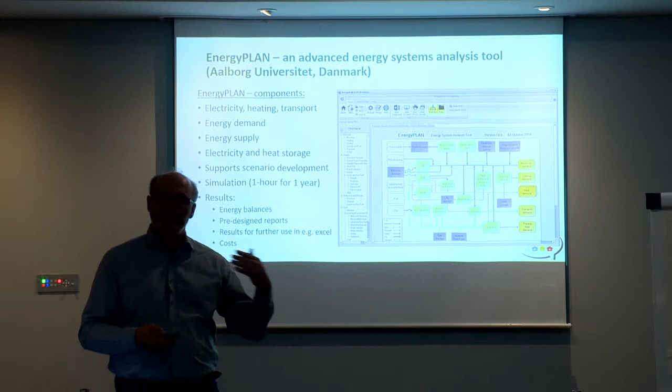So what is EnergyPLAN? EnergyPLAN was developed by Aalborg University in Denmark with the idea to help a developer or an energy systems analyst in the transition from a fossil fuel based energy system to a sustainable renewable energy system.

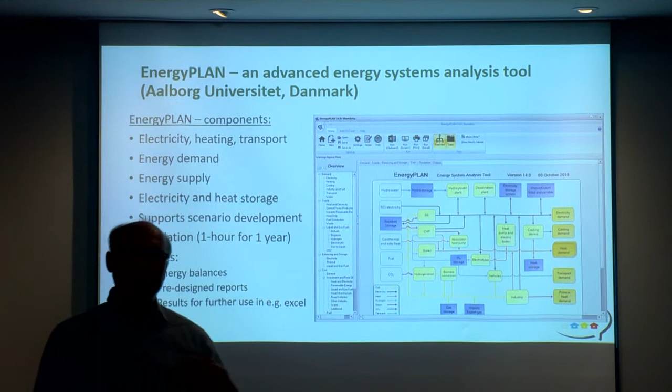And it was also one of the first tools which tried to integrate different energy sectors with each other, electricity and heating, and also transport.

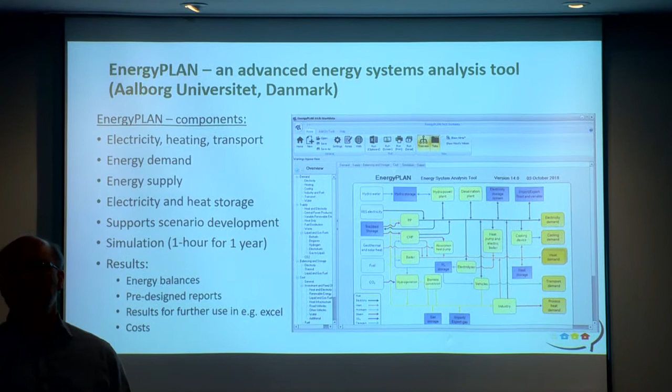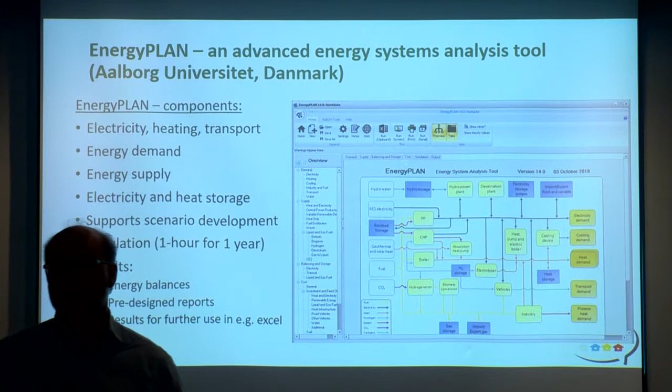Because the vision was already in the late 90s when they developed the tool that, of course, when we invest into wind, it will lead, and it has led, into overcapacities. With more wind, electricity prices drop. For example, we can use electricity now much more for heating than we used it before in some countries. Of course, Sweden and Norway are exceptions because we have so much hydropower - we have used electricity for heating since 50 years back.

So electricity from the overcapacities which we create can be used in district heating systems with heat pumps and accumulator tanks. Large storage tanks are built and hybridized, let's say, with biomass or solar thermal.

But it also opens the possibility with electric vehicles, because when we replace fossil fuels in the transport sector with electric vehicles, we create electricity demand. And the vehicles have storage, so that will also help to balance an integrated system.

And electric vehicles - I think already today the prices have dropped, as with other technologies we have experienced: solar PV, wind onshore, wind offshore. The prices have come down tremendously in the last 10-15 years, and even electric vehicles will come down even further.

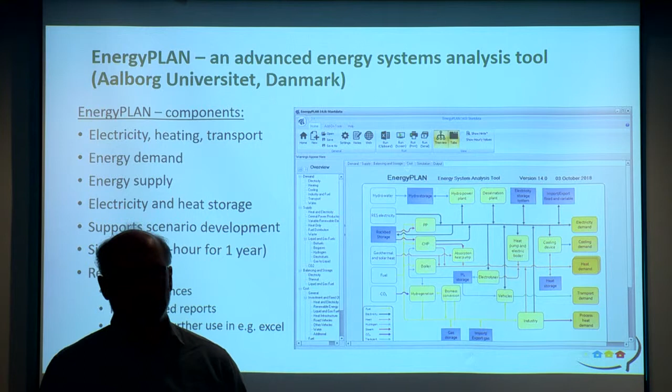But I think already today, if you are a commuter and travel every day, 15, 20, 50 miles back and forth to your workplace, it would be worth it to invest into an electric vehicle. At least in Sweden it's worth it when you compare the prices of fuel and electricity and what electric vehicles cost today. And they have less service costs, etc.

So EnergyPLAN includes the components electricity, heating, transport. Transport has also a lot of features where it can convert electricity into what they call synthetic fuels, hydrogen, methanization, etc., and can then be used in the transport sector. But I think for us here in this training, we won't look at the transport part - it's just a bit too much.

Electricity and heating, we look at these two parts. So the energy demand is modeled in the different tabs - this is the demand part with electricity, heating, etc. And in the reference energy system picture, it's these orange boxes when you open it. They are not clickable, it's just an overview about what EnergyPLAN provides once installed and opened.

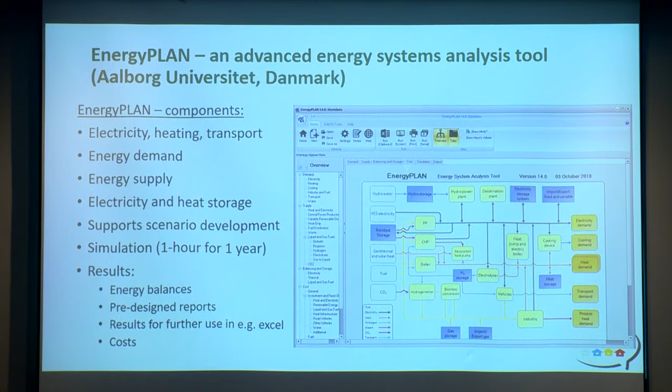And then of course the supply side here - we have hydro, we have other renewables, solar, wind onshore and offshore, etc. And then a lot of conversion options in between.

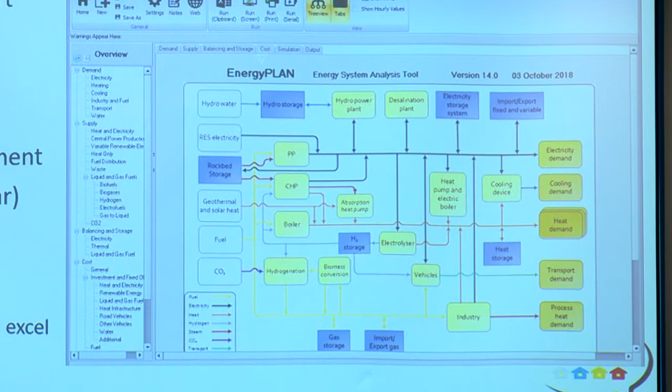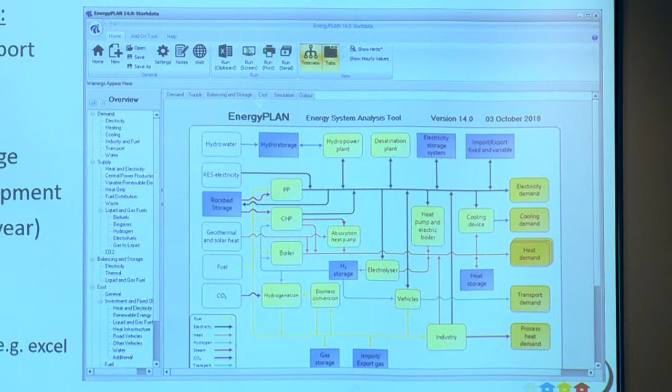Supply. And then what is perhaps of interest in some of our cases, as we discussed, electricity storage and also heat storage could be an option. Heat storage in the case if you have district heating systems. Many older district heating systems have not installed larger storage tanks.

But today the overcapacities of wind and cheap electricity prices can be used to charge the storage and then used in peak demand periods. Many people think district heating utilities earn the most when it's the coldest, but the problem is then during that period they actually have to start their peak boiler. Usually they have 2 or 3 boilers, and the peak boiler is often fired with fossil fuels, not the large boiler which carries the base load, which is perhaps wood chips, biomass.

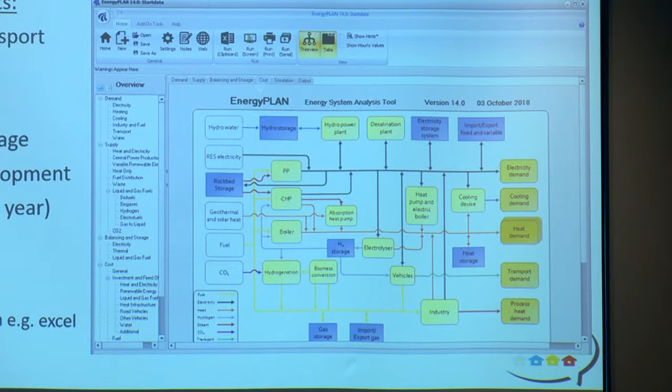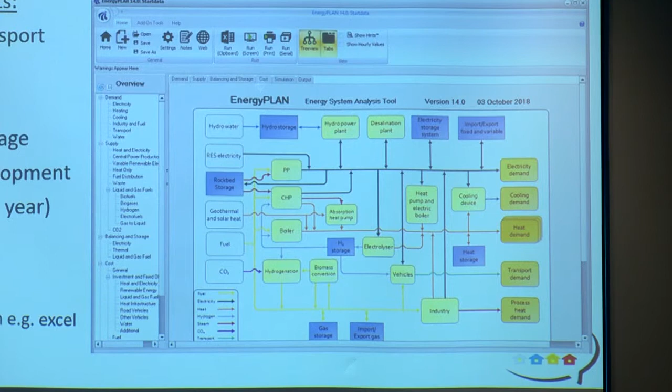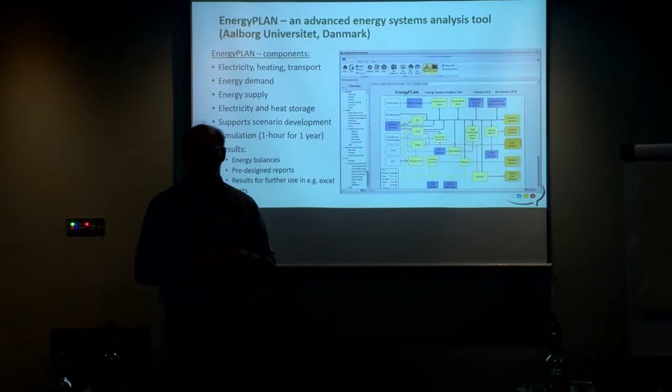And that is actually costly - it also costs CO2 tax in Sweden, but people don't pay more during peak periods. There is also a trend now in district heating to introduce time-of-use tariffs, so that people pay more when it's very cold, creating an incentive in the market to invest into more energy efficient buildings.

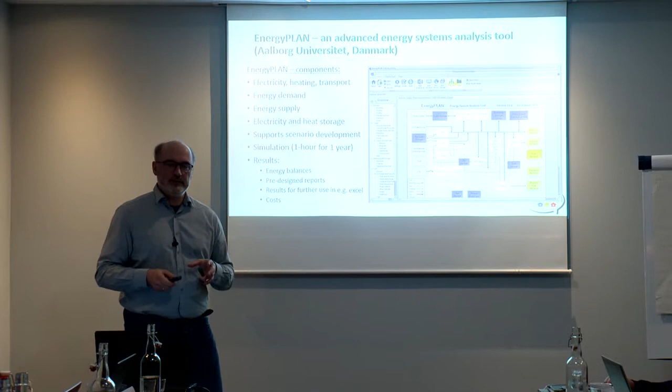It supports scenario development. And how does it do that? Of course, you create your model, put in all the data, and it's not so that on one half you have your base case and then you enter new data in a second half.

You use your base case, change data there, and save it in a separate file, documenting what you are doing. That's a bit of a challenge to keep track of what you're changing, because you can change your model easily with a few steps and then save it and overwrite your base case. So that needs to be kept in mind when you've built your reference case - save it and copy it, and then start creating a scenario in a copy of the original.

So that's a little hint how to use it. We can run these simulations, and they are very fast. They take just a second or two in the system when we enter new data.

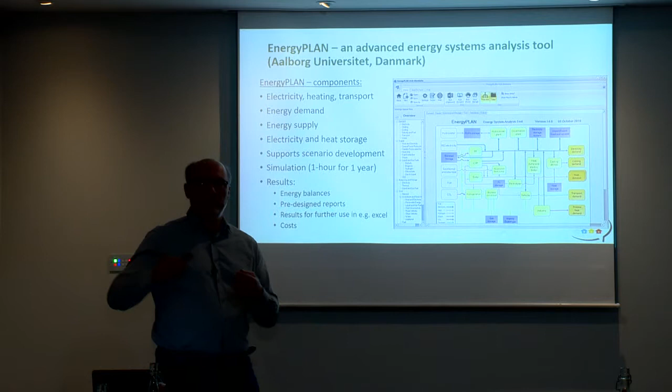Most tools which look at long-term optimization or simulation run in 1 year time slices only, so you get results for 2020, 2030, 2050, etc. EnergyPLAN was developed to have 1 hour time slices for 1 year, so 8,760 hours. It's a special case because they actually model a leap year, so you need 8,784 hours. When you get data for certain years, you always have to extend this extra day.

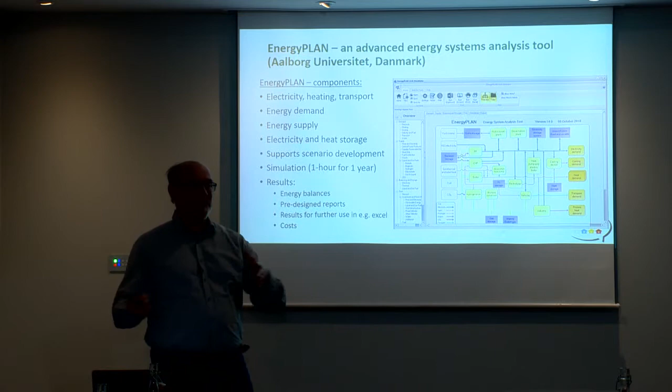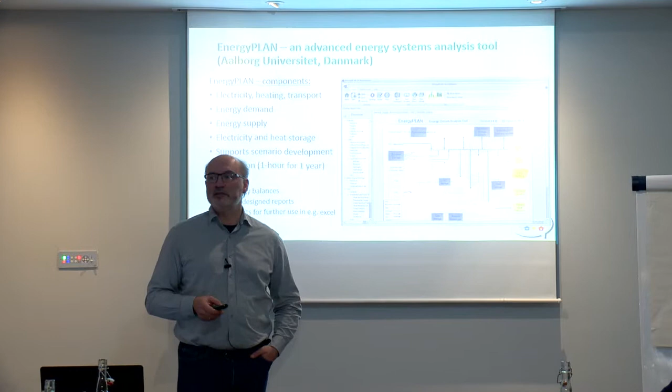But the advantage of these 1 hour time slices is that when you include renewable energy sources which go up and down every hour, or even every minute which we cannot model with this tool, but at least every hour we can have higher or lower wind production, and also higher or lower demand in households, on weekends, or during peak evening hours. This can be covered by this model, while tools that help develop long-term strategies do not cover this.

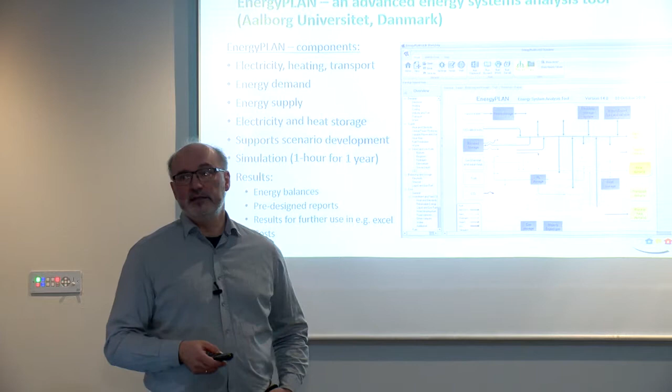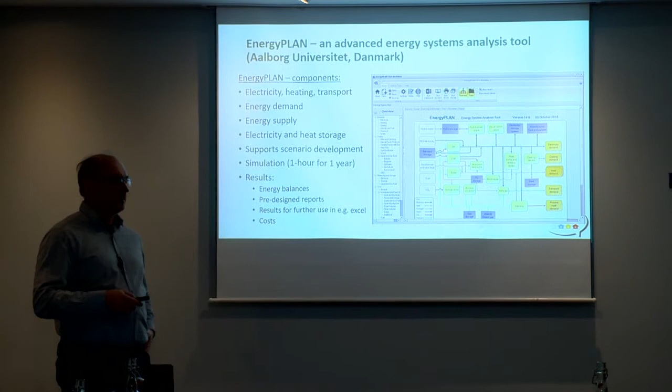So what do we get for results? We get the energy balances, demand and supply, and see how it's balancing out. As we invest in local wind production, we can see that we import less, and we also look at the costs, because importing costs money and exporting creates revenues.

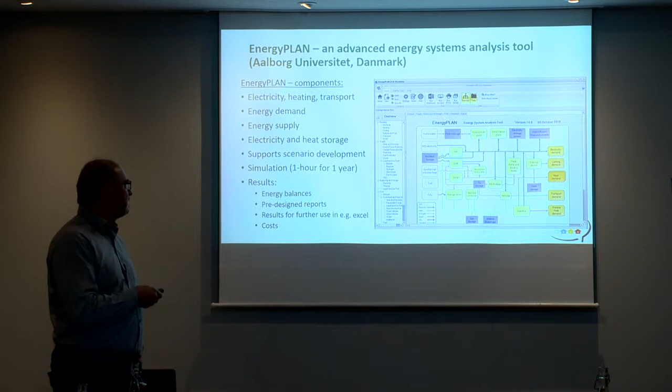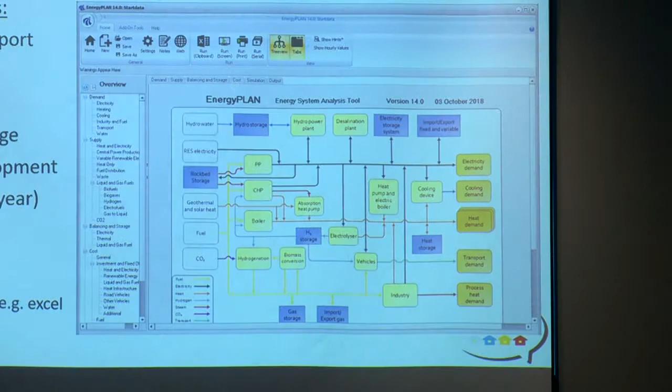It has some pre-designed reports which we get when we click the run buttons, run screen or run clipboard. They produce the same results, but with run clipboard you can easily paste it into Excel, which most of us have. Run screen just puts the results in a separate window so you can look quickly at it.

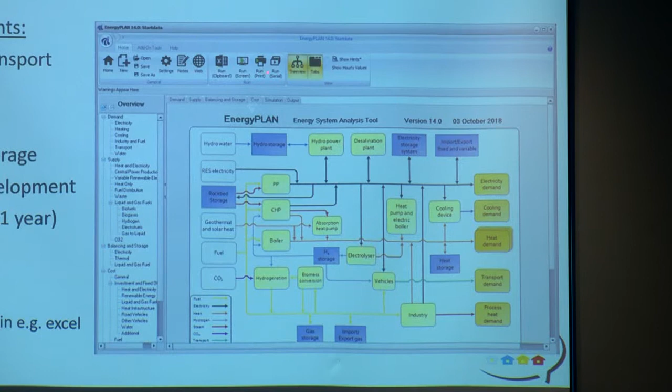Then we have this run print option, which creates a 2-page predefined report with key data, which can be attached as an annex to a report you create. With run clipboard, you can copy it into Excel and create your own diagrams comparing scenarios, etc.

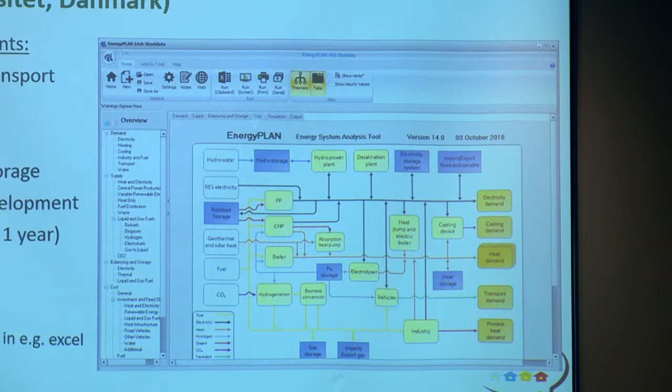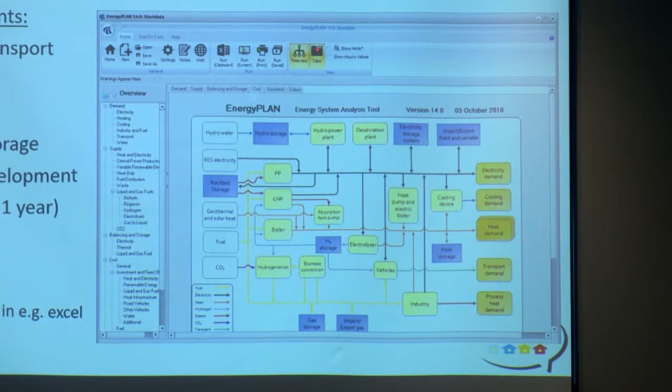Just looking at this picture, we have navigation in this tree navigation part, but we can also switch on this tabulator navigation. Then we have tabs up here which allow us to click into different screens. But from my experience, it's most practical to use the navigation tree, though you will find out yourself.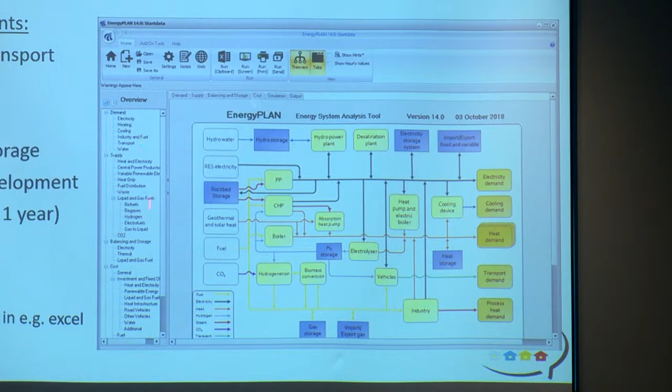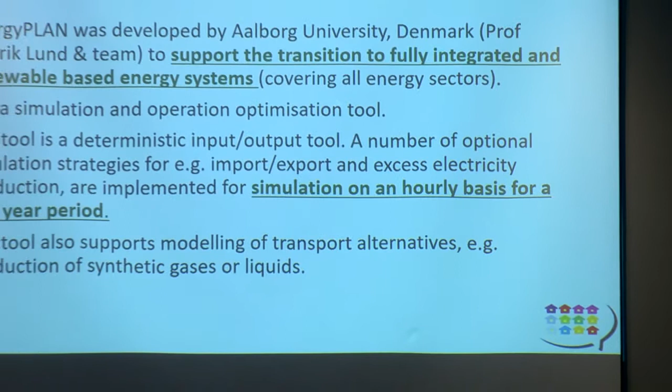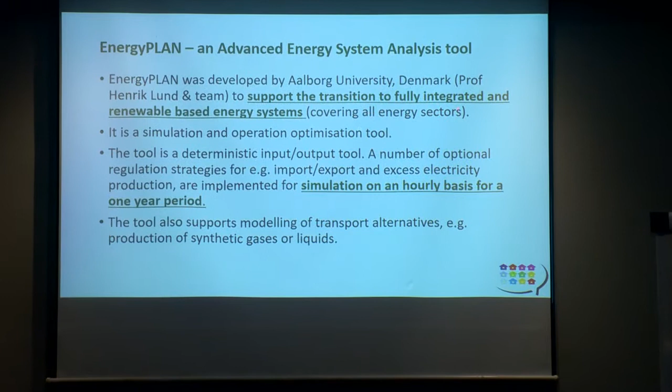So just to summarize: developed by Aalborg University in Denmark from the 1990s to support the transition to fully integrated and renewable-based energy systems, covering all energy sectors. That was also important, otherwise you cannot really talk about integration if you don't have a model which helps you work on that integration. And it's a simulation and operation optimization tool, simulating on an hourly basis for a 1 year period.

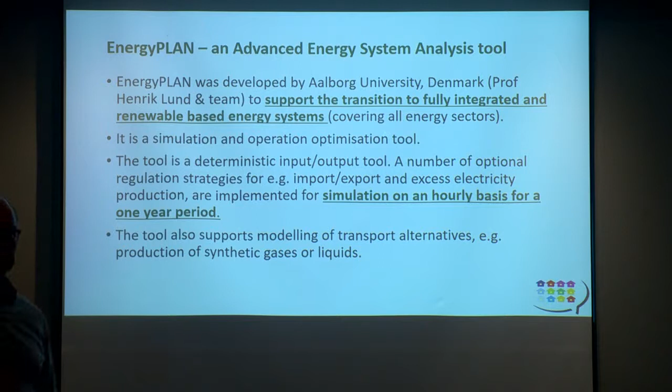Then I usually get the question, how do we model 2020 or 2030 scenarios in that time? You look at your population development and economic development. If your population growth trend is like 2 or 3% per year, or 1%, then instead of 2,000 households, you will have 2,200 households by 2025 or 2030. The household energy consumption then has to be created and enlarged by household energy consumption per household, and you increase that to get a scenario for 2030.

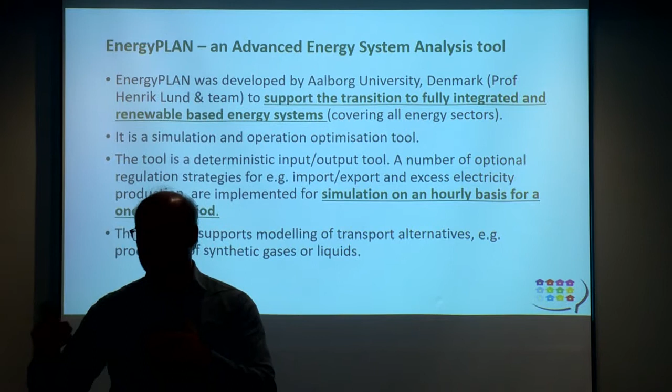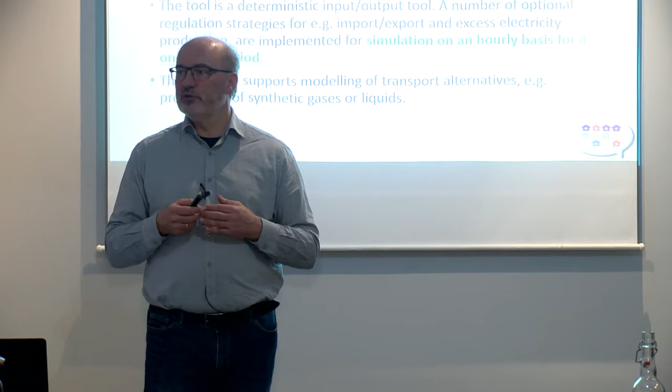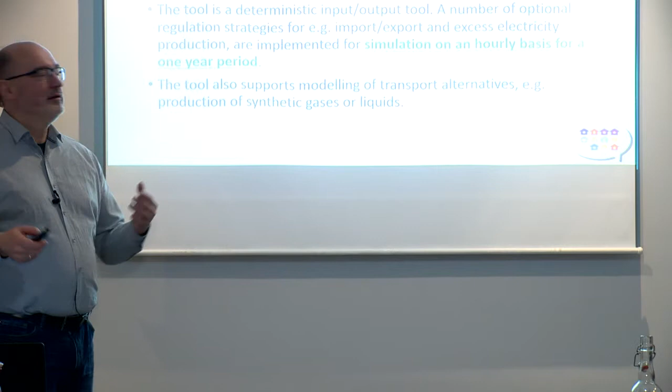Same with economic growth: when you know you have a quite big industry in your peninsula, you could discuss with the different industries and say, we plan to expand, and this is what we expect in the next 10 years, and then you can create the 2030 scenario for energy consumption. At the same time, you should consider more efficient use of energy, so energy demand is increasing on one side, but also dropping because we invest in energy efficiency as well.

Other cases for 2030 scenarios: today there is no wind farm in our community, but the master plan we just created foresees that we will have, let's say, 40 to 60 megawatts in our community, and that can be implemented in a 2030 scenario. So even if you have only a 1 year period in a simulation tool, you can design your future scenario as you go along, by putting the right input data into the system.

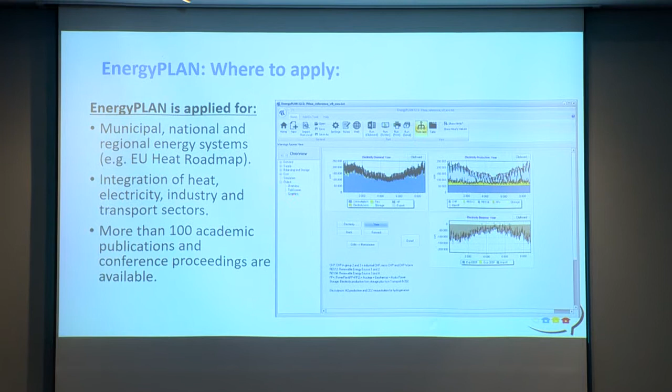So this is, for example, how the graphics look when you open the output navigation here and click on graphics, you will have some diagrams like this: electricity demand for the year, electricity production for the year with different sources, and then this is the electricity balance for the grid.

In this case, most of the time we have import from the grid, and only in a few hours per year we have export from the hydropower or wind power installed. You have buttons for clipboard, so you can copy paste these diagrams into your reports as well. If you don't like them, you export the hourly data.

Whenever you do a run, you actually get monthly averages in these predefined reports. When you want to look at the hourly data, you switch on the hourly possibility here. Then you get long reports, but they can be used to create these diagrams on your own, and you can build on that.

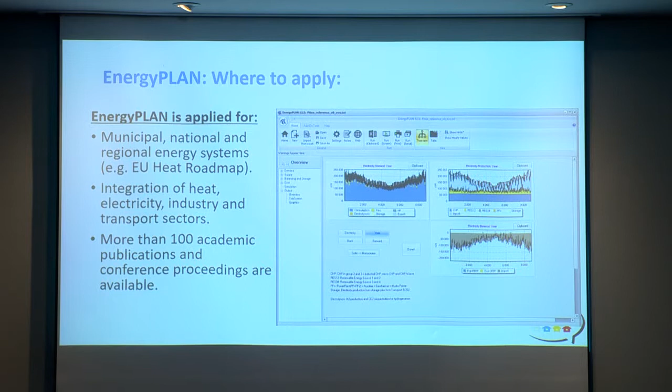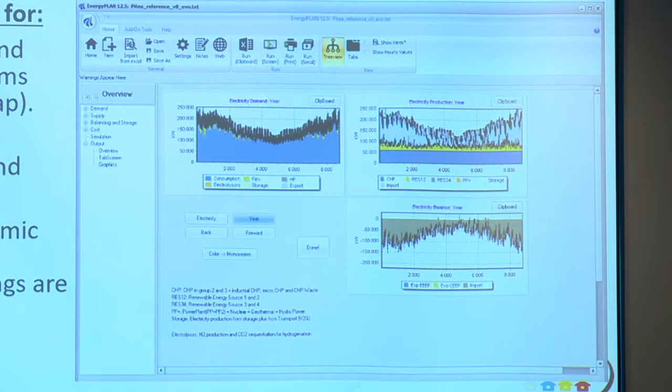EnergyPLAN has been used in the past on municipal level, on national level. It was created for national level, and the first examples are of course Denmark, because it was developed in Denmark. It was also used on a wider level, like for the European heat roadmap. I had a small slide on that in one of the presentations. So it can be used also in a wider perspective.

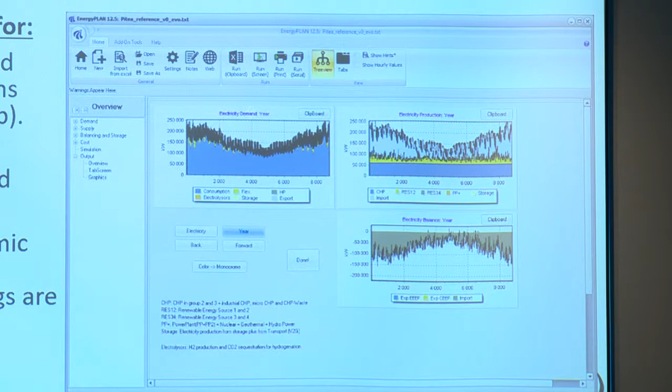Again, it integrates heat, electricity, industry and transport sectors. We have seen many academic publications on how to use it and in which cases it was used. A very interesting one was just published a few weeks ago about the Åland Islands.

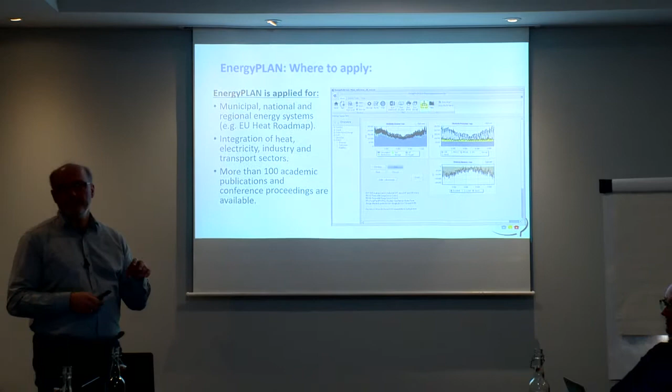These islands lie in the Baltic Sea between Sweden and Finland. They have two power cables, one from Finland and one from Sweden, and they want to expand their tourism industry, etc., but the power cables are insufficient. So they either have to invest in expanding the power cables or make sure investments go into local production.

And this doesn't only include production but also storage and balancing, to make sure the power cables they currently have are not overloaded, both in import and export, when they invest in wind, for example. So that was very, very well done.

I can perhaps also share it. It has supplementary materials which also describe very well how to create your input data, etc. That would be very relevant.

So how does the workflow look like? We already started the workflow. We have created these reference energy systems. Some of you have already done some inventory on the number of buildings, etc. When we know how much energy each building consumes on average, we can create the annual energy consumption, the annual demand.

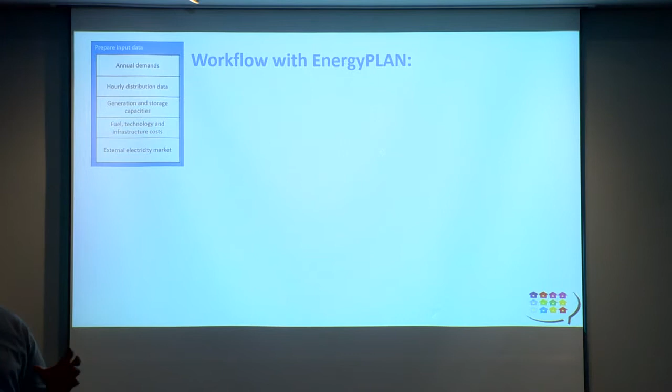This is what EnergyPLAN needs most: the annual aggregated data on energy consumption in the different sectors. As a second part, the hourly distribution profiles, which perhaps you have come across when you downloaded and looked at it. So we need to know how this annually produced or generated energy is distributed over the year.

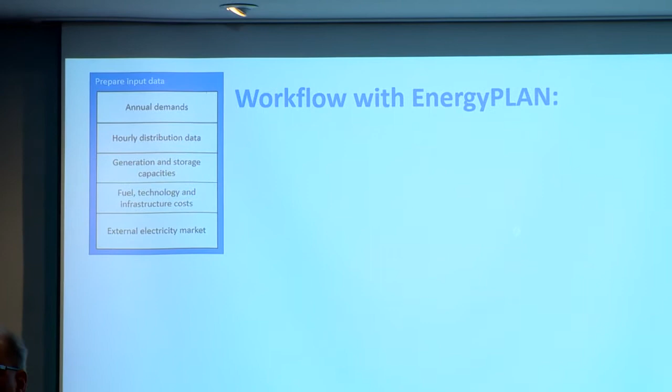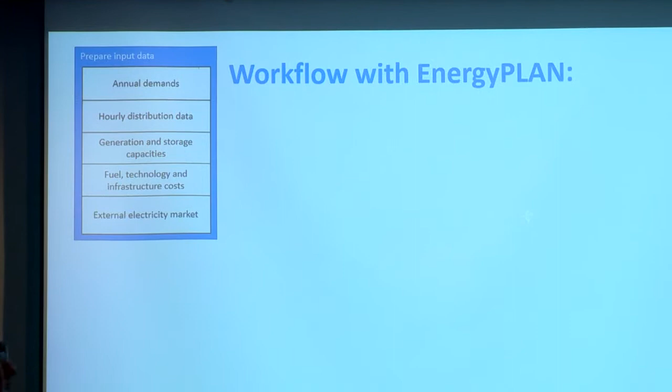So these two are the main data inputs we need. And this data is of course very site specific for the country, or for Åland, or for any of the examples we have seen before - the annual demands or supplies and the hourly distribution data.

So the hourly distribution profile - if a household used like 20,000 kilowatt hours per year, you don't yet know how much is the peak demand on Friday evening. Household electricity demand usually has a peak in the morning and a peak in the evening when people prepare breakfast, cook in the evening, or take showers and the hot water boiler kicks in.

A commercial building usually has a peak over the day when all the people work in the offices - you have ACs running, lights, computers, etc. So this is the daily profile, and that can be sliced into hourly slices, and also all over the year, of course.

We don't need these profiles for each house. For example, for the heating demand, we take temperature profiles from the meteorological institution - yeah, from MET, in Sweden it's SMHI. You get hourly temperature data for the location or nearest weather station, which can be converted into the heating degree day distribution profile, the driver for distributing the annual heating demand of 20 megawatt hours into hourly time slices.

As I said, the aggregated data in the national statistical databases is usually on municipal level, and everything below is more or less a bottom-up estimation. You have, say, 200 residential buildings, most built before 1990, some built later, and you have to create your own estimation, as long as you can justify your assumptions. Of course, you will never get it exactly on point, but if you're within plus or minus 10%, it's good enough.

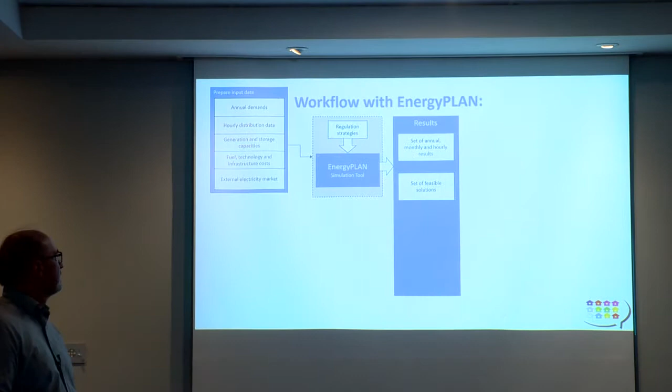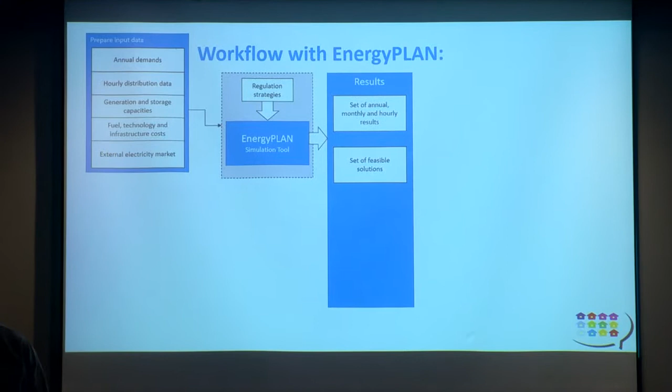So that's like preparing data input, and then we feed it into EnergyPLAN - we will look at later how to use the different screens. After we've done the input data, we get some results, and then we compare it with reality. Every model, of course, is a simplification, so we will not get an exact picture of reality, but when we validate our reference case, it should actually reflect what's happening in reality.

And if you have deviations, it could depend on your assumptions, or you don't know the exact data of the technologies used, like the district heating system, the size of the boilers, etc. But you can always justify that you are within a certain range, and that your model is good enough for your purposes.

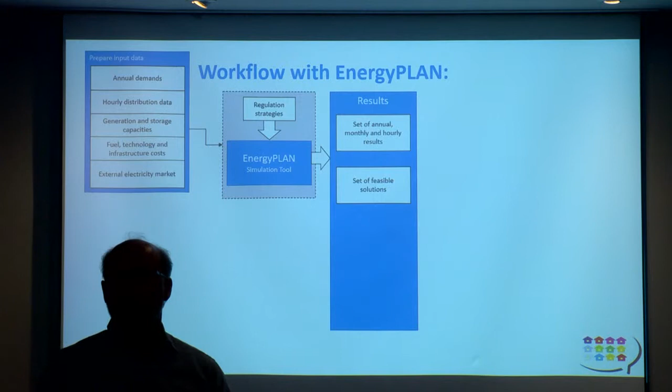As we discussed, starting with low-hanging fruits, and then resources - what land is available? Do we have an area of 2, 3 or 4 soccer field size which we can use for solar PV? Is there an old landfill which cannot be converted into building area, so we put our solar panels there? Or do we have an old industrial area which is contaminated, which would be very costly to put into shape for human purposes - put solar panels there instead. So you always have this, especially in the smaller community area, which helps you limit your scenarios.

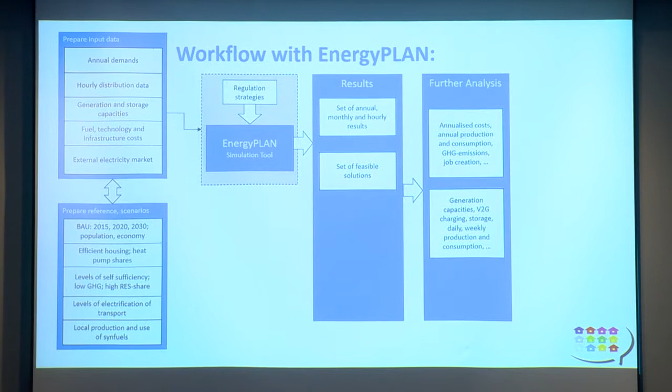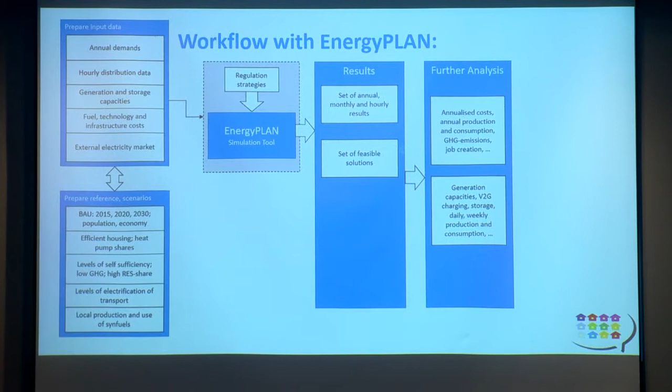Okay, we're talking about scenarios. As I said, after you've done your runs and you know what data you want to look at - is it mainly carbon emission reductions, or increasing the renewable energy share in the heating sector or electricity supply - you create your scenarios. The scenarios lead to new input data, and then you do the simulation again, analyze your results, and this circle will be repeated a few times until you settle on what scenario you really think is the best one.

One of the case studies we did is the Piteå case. This report on the Piteå case is quite comprehensive - it includes more or less a step-by-step guide on how to create one. But what was our starting point? It was actually the climate and energy plan from Piteå, a town of about 40,000 inhabitants, or a municipality. The main town has only 20,000, and then we have the smaller villages around.

They are also a member of the Covenant of Mayors, and for that they created this climate and energy plan, called the Sustainable Energy Action Plan. So what were their ideas by 2020, and then also by 2030?

The idea was to replace direct electric heating with individual heating with heat pumps. A lot of houses in Sweden have direct electric heating because of traditionally cheap electricity prices. Electricity prices are going up, and direct electric heating causes high electricity peak demand during the winter period. And for example, another scenario says they want to invest in electric vehicles - then the electricity grid will not be able to provide the power for both the electric heating and the electric vehicles.

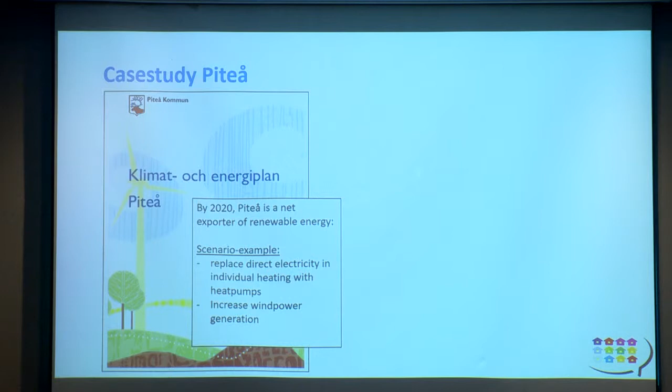So something needs to be done. Heat pumps is a scenario. Another scenario example is because one of the goals in Piteå is to become a net exporter of electricity. They don't want to import, but at least over the year balance, they want to be exporters. So one option for that is to increase wind power. They already have about 145 megawatt installed by today, and in the master plan there is about 1.2 to 1.8 gigawatt to install in the community. It's a huge community.

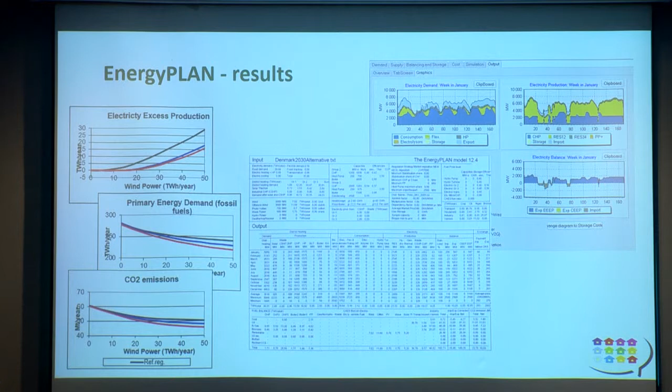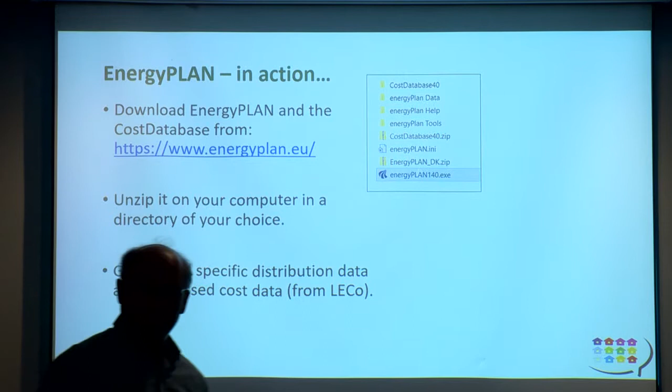Yeah, so I think we are way over time, but starting to get a little bit tired here. Not only me, I guess, also you around here.

The idea was actually to check if everybody has installed it, but I think everybody has done it. You have installed EnergyPLAN, gotten it to run, looked at it, clicked around a little bit perhaps. Have you had a chance to look at the exercises as well? No? Okay, there's a lot of training material also on the website, and step-by-step guides for simple exercises. They provide the task, like in school—you get your task, and in school you don't get the solution, but on the EnergyPLAN website you also get the solution. So it helps you develop your skills step by step.

But we will do some of it together tomorrow. I think it's really enough for today.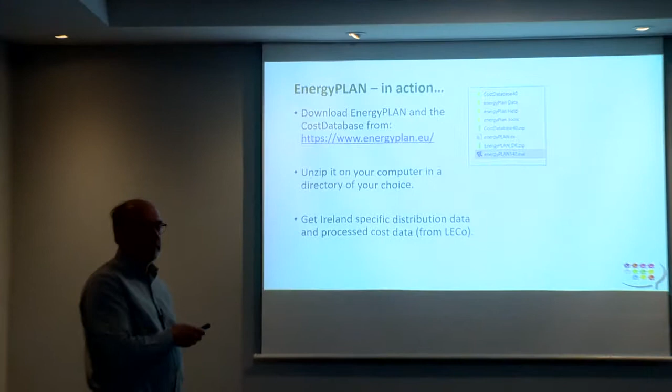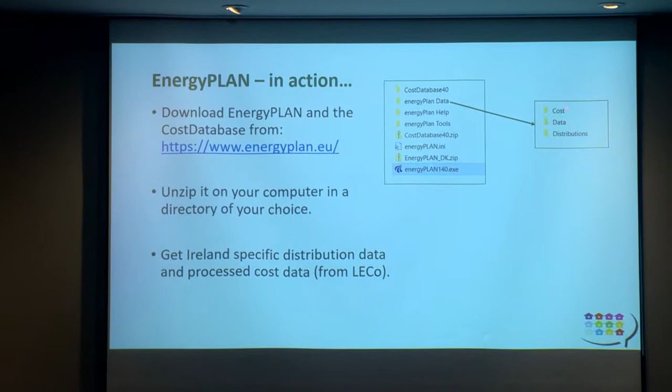We know where to get it, and when you have installed it and unzipped it—oops, wrong button again—you will have a folder structure like this. You have the executable, which you just run, and then you have these directories which are mainly used by EnergyPLAN, especially the data directory, which includes the cost database, and then the data, which is the actual project data file, and these hourly distributions, which we will see much more about tomorrow.

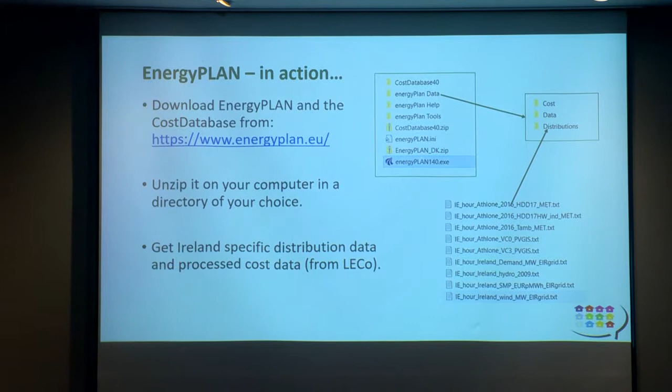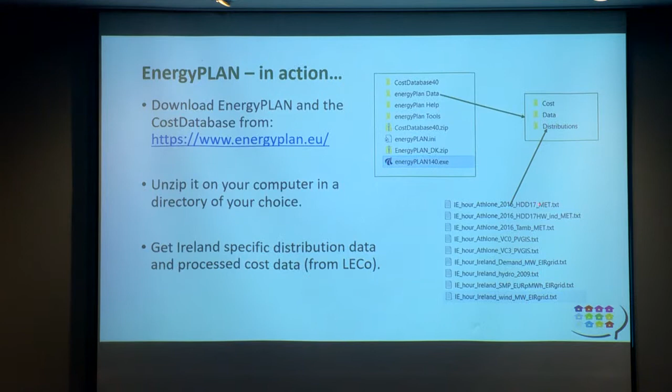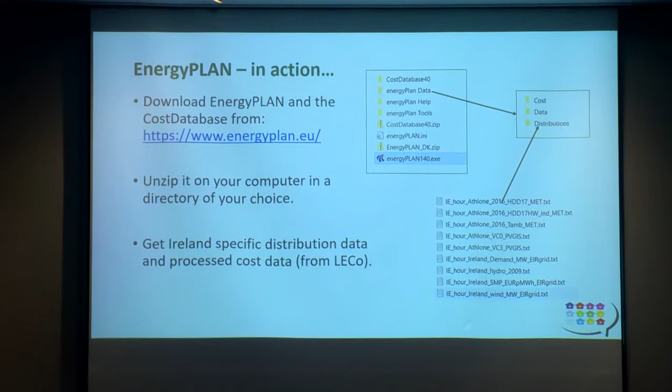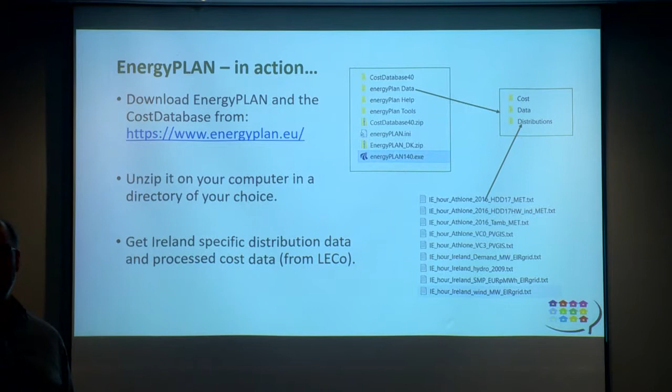In these distribution files, I managed, with help of Xavier and Christoph, to create these hourly distribution profiles which we need for all our projects. We have this HDD data, the heating degree day data, which are the converted temperature data. The temperature data file is also there, but we don't use it directly. Then I have created and used this PV-GIS simulation, or solar simulation tool, which is available online, provided by the European Union, the JRC, the Joint Research Center. So we have two solar files.

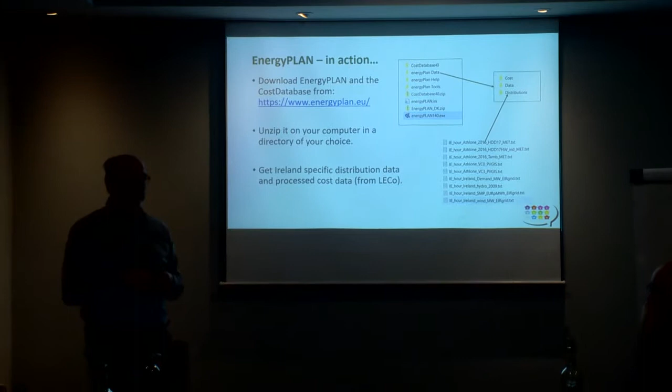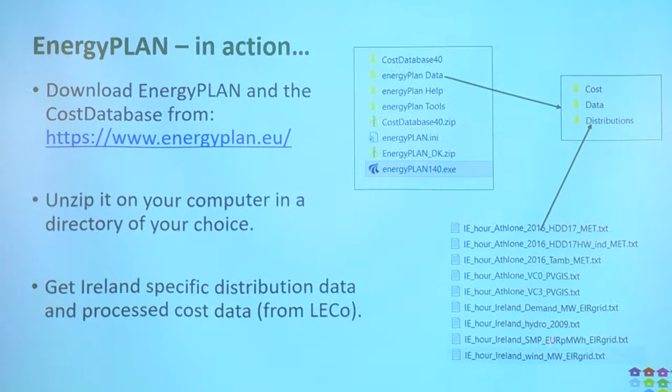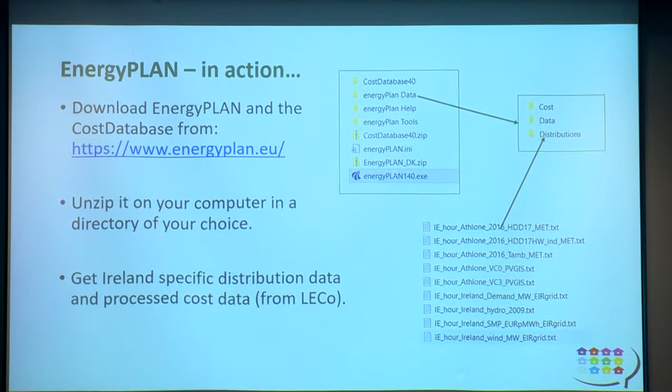And then we have the demand hourly profile of the national grid. So this is what we will use for the electricity consumption profile for our little case—of course it can deviate a lot from our actual case, but this is what we have got for now. There is also the electricity prices here from the system marginal prices. We also have wind production from Ireland, the total Ireland wind production hourly profile, which is of course a mix of offshore and onshore—mostly onshore, as there's very little offshore.